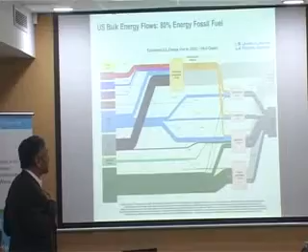This is a very busy slide which you probably can't see from the back. But use the lights. Is it? Can you see this clearly? We could dim some of the lights actually. Meena? Yes, fine. Dim some of the lights at this end.

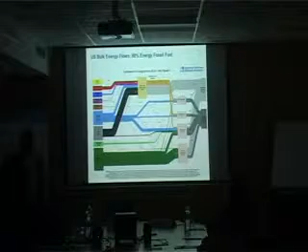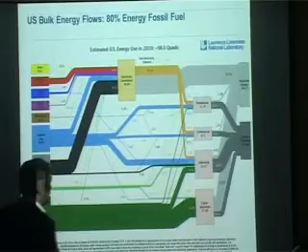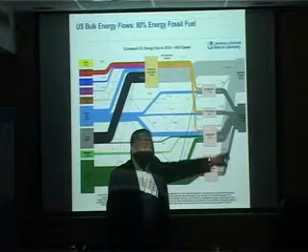It's only there for illustrative purposes, but it's to show you that about 80% of the energy used in the United States, and probably similarly here, is from fossil fuels. This is the petroleum, and it accounts for the largest amount of energy use in the transportation sector, which is remarkably inefficient. If you look at this, this is the only usable energy that comes out of the petroleum sector. This is all wasted energy. So we use oil particularly inefficiently.

And there's a small amount that goes into industrial use, which is a little bit more efficient. But by far the biggest problem that the US faces is with regard to the petroleum part. 2/3 of our petroleum in the US is imported, and roughly 2/3 of it is used for transportation. So it's extremely difficult, and this is the key problem of what to do with the imports, which is key to energy security. As Dr. Ghosh pointed out, our whole energy policy is related to trying to reduce these petroleum imports to the maximum extent possible.

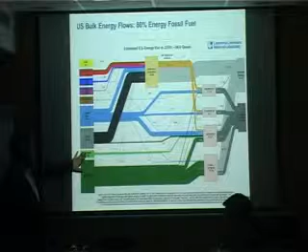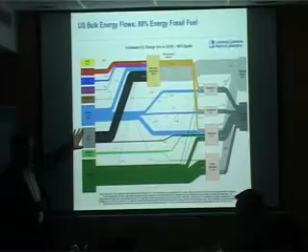Biomass is very little in use, primarily directly by burning stuff. Coal is a large domestic resource, and of course it's primarily used for power production. Natural gas is a major domestic resource, and increasingly the US economy is becoming natural gas focused. Let me digress a little bit. Natural gas in the US is currently selling at $4 to $5 a million cubic feet, whereas in Europe it sells roughly at $9 a million cubic feet. So the differential is very large, and it's unlikely that that can be maintained.

So you can see that the issues with natural gas also are going to be to use it more efficiently, because this particular scenario cannot really endure for a very long time. Already every investor is building LNG facilities so that you can export it to some other place, and to just make LNG and export it is better than burning it at $4 a million cubic feet.

To give you another idea about natural gas, even in New York State there is something like 50 years of New York State's natural gas usage just in the recoverable shale, which is shale gas. So there's been a huge production recently by innovative techniques of natural gas using hydraulic fracturing and horizontal wells, and probably this is an area which will become very important in the rest of the world as well.

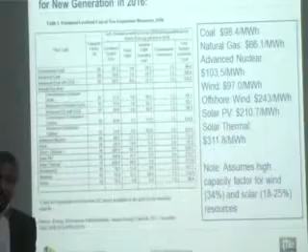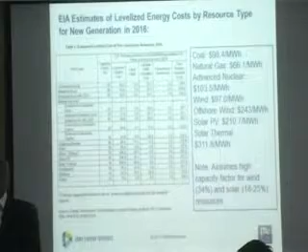But at the moment, again, the units have changed. But coal is coming in at about 10 cents a kilowatt hour, roughly what numbers I showed you before. So it's a little bit below 10 cents. Natural gas comes in right about the number that we're talking about, 7 cents a kilowatt hour. Nuclear comes in with the new construction at about 10 cents a kilowatt hour.

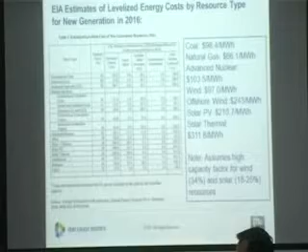The old nuclear costs almost nothing. It's of the order of 1 or 2 cents a kilowatt hour, because those plants have been paid off and they're running at 80-year life. So a nuclear plant is like a dam. It goes on producing forever. Wind is competitive. It's coming in around 10 cents a kilowatt hour right now.

Solar is about 21 cents. Offshore wind about 24 cents. Solar thermal about 31 cents. I've been very generous here. With wind, to get that number, I've given it a 34% capacity factor, which means that you've got an enormous amount of storage. Typically, in California, for example, you're allowed only to count 13% on the capacity factor.

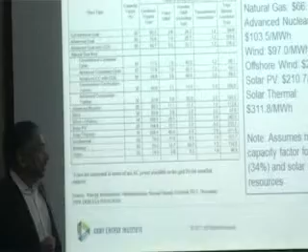Maybe in India you can count 14, I don't know what the number is. But this is more than double. Okay, so actual price of wind is roughly twice that number. Okay, 2.5 times. And I've also been very generous with the solar. So even with this great generosity, you can see that renewables have a long way to go.

And the key to getting these high capacity factors is going to be storage. To drive wind up to 34%, you've got to have enormous amounts of storage as a capacity factor. Next slide.

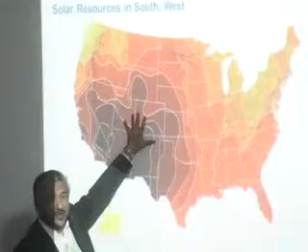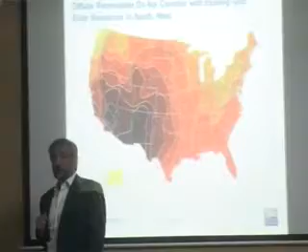So next slide, please. This is where the wind, this is where the solar is. Most of the solar is in this region, in the US. And they're very far from this area where you saw the dense transmission network. So you've got a huge problem in getting the solar stuff, even if you could produce it, to where it's needed. And it's more difficult to build a transmission network in the US than to build a nuclear plant.

Okay, so that just keeps it in perspective. There are 13 nuclear plants under construction and almost no new transmission lines. So it's extremely difficult to get it built. Okay, so that's one other problem. Let me show you where the wind is.

Next slide, please. All the wind is in this region, at least the offshore. There is some wind in Texas, this Midwest region, but it's there. And again, it doesn't coincide. This coincides a little better than solar with where the use is. So congestion on the transmission lines becomes a very big issue.

And one of the ways that you can, again, relieve congestion is by storage. So that gives you, without going into the details, one of the other reasons why you want to have storage, so you can transmit when there is no demand to use the existing transmission lines.

Otherwise, the transmission lines will only be meeting the peak demands. Next slide. I wanted to talk briefly about coal, because coal is, whether we like it or not, going to be an extremely important resource. And if there is a carbon dioxide problem, then the only way one would be able to use it was with some form of carbon sequestration.

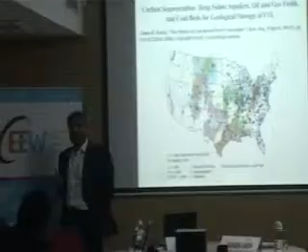And what I wanted to illustrate with this is that in the US, coincidentally, the coal plants were built in areas where the possibility of sequestration is pretty good. It's remarkable, actually, if you look at it, that the sequestration possibilities are in the region where the coal plants are. That doesn't coincide with what happened in China. If you look at China, they have almost no possibilities to store in geological formations where the coal plants currently are. So they would have to transport it quite a distance. I haven't got a map of China, but there's a similar one of China.

Okay, so in a sustainable future, I think coal will probably have to play a role. And probably if carbon dioxide is a problem, sequestration has to go ahead with it, be a sort of part of the strategy. Anyway, now let me move on. I wanted to talk to you about batteries.

Okay. So one possibility is to store energy directly, electricity. Electricity being source agnostic is a particularly useful thing to make. Doesn't matter how you make it. Transmission can be done with the existing networks. Storage is the big issue. The way things are stored is basically through chemistry. What you have is a cathode and an anode, which is some chemical material. And there's a reaction that occurs.

In one case, the reaction generates or uses up electrons. In the other case, the reaction produces electrons. This was actually an animation, which is not working right now. Otherwise, you'd see them going around. And electrons only transfer along these so-called electrodes. And the electrolyte only transmits ions between the two electrodes.

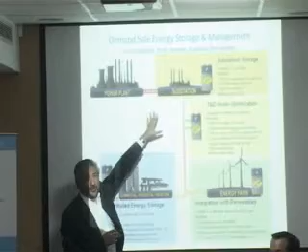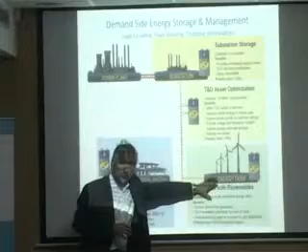Next slide. The idea then is that what you have is storage at various levels. You can have storage in the power stations or the substations. You can have it in transmission and distribution networks. You can have it near your wind farms. And then you can probably have the storage within the place where you're using it.

This is an area where we've been very interested, because in places like New York, the real problem arises in the distribution networks rather than the sources of energy. There is a lot of energy from natural gas or from nuclear in New York, but distributing it within Manhattan or within the boroughs is a big problem. So if you can put storage either in the distribution points or in the large buildings, that's the most economic solution.

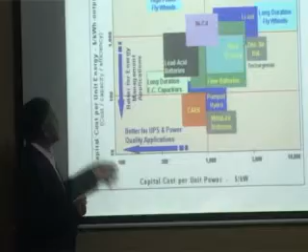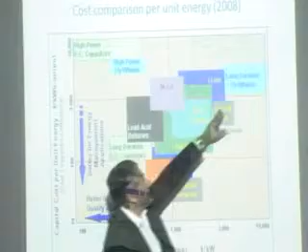Let me go back to the cost. This side is the capital cost in terms of power, and this side is the capital cost in terms of stored energy. You can see that the most economical system, where you can get it, is pumped hydro, which is to store it behind dams, but that's not feasible everywhere unless you're Norway or Bhutan. The second is to store air in caverns, and there are only a couple of installations where this is done. Other than that, you're almost all in the battery space. If you need very high powers, maybe flywheels. But this whole area is batteries.

Of the batteries currently, lead-acid batteries are very attractive. The only thing not attractive is their lifetimes. They're relatively short, so for a utility who wants a 15 to 30-year life, it's very hard to guarantee more than a 3 to 5 year life. And there are few technologies today being used at utility scales. There is a set of nickel-cadmium batteries being used in Alaska, a big, I think 45 megawatt system, and those are attractive other than the problems with disposal of the cadmium. They're pretty high cost. So the area we are interested in is specifically this area. I've put metal air, but it doesn't have to be metal air. There are metal anode batteries, which can come down to the cost of pumped hydro.

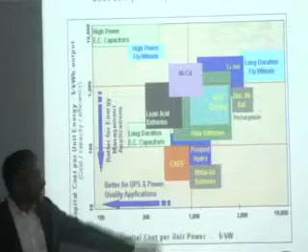And this is the innovation which is going on more in this area right now. It's mainly to produce energy when needed, and it's not, as I said, for frequency control, it's not very high power. It's less high power, but it's high energy density and relatively low cost. Everybody wants to be around $100 a kilowatt hour, if possible.

So think of a Duracell. A Duracell is a metal anode battery. It's a zinc anode battery. Duracell is not rechargeable. It's the one you put in your flashlight. These alkaline batteries, they're $33 a kilowatt hour. They're extremely economical. So if you could make a rechargeable Duracell, how would you do that is quite a trick.

But if you could make a rechargeable Duracell, even at $100 a kilowatt hour, you would own the market because you'd beat pumped hydro at that point. So that's the whole interest. And that's why there is so much emphasis on energy storage right now, because it would enable renewables by making it much more economical. It would relieve congestion, make your transmission distribution systems work much better, relieve congestion in cities, and of course, as you have power cuts, it could be used to back up the current grid, and off-grid or even side-grid. Next slide, please.

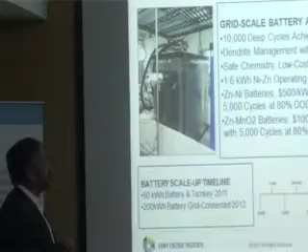So this is some batteries we've been doing. This is like a rechargeable Duracell. We turned it from a solid to a battery where you can manage the electrolyte and do the chemistry. The targets are to get down to about $100 a kilowatt hour, which we are not at yet, but that's what we'd like to do. With 5,000 deep cycles. And we're on the way. We've built large systems, and we are roughly here.

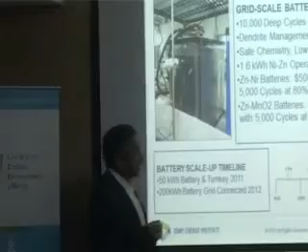A 50 kilowatt hour system would power a building like this, roughly. And if you want to go to a substation, you need to scale it to about a megawatt hour, which could be made out of several of these 50 kilowatt hour units. So that's the sort of interest in this technology. Next slide, please. So let's go to the last slide so that I don't keep on keeping people busy.

One more slide. So my conclusion is, for a sustainable future, the most important thing to reduce or slow down use of would be oil. It doesn't mean that there isn't a huge amount of oil in the world. I was just in Rio and talking with Petrobras, where they found, as you know, the pre-salt oil. The pre-salt oil, when Gondwana land started to separate, there was this huge lake with salt there, a large saltwater lake, and all the organic material that went under was preserved.

So now you have the Atlantic Ocean, and at 7,500 meters, the pre-salt oil. You have 3,000 meters of sea and 4,000 meters of salt. And they're trying to get it out, and it's a huge resource. And they think that there's a similar resource off Angola. So we're talking about probably a lot of oil there in the world, and it'll be used slowly. But we want to reduce as much as possible the use of oil.